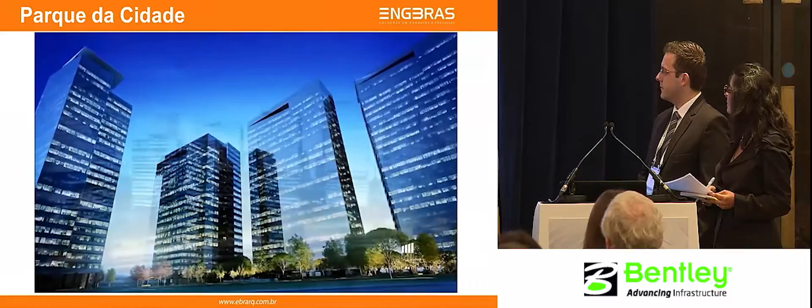It's a very large development with multi-use buildings. It's been created with the concept of compact cities, where everything that the user needs is there.

This project is located in the city of São Paulo in Brazil. The project has 10 buildings with different uses: some for residential purposes, commercial purposes, and a shopping mall.

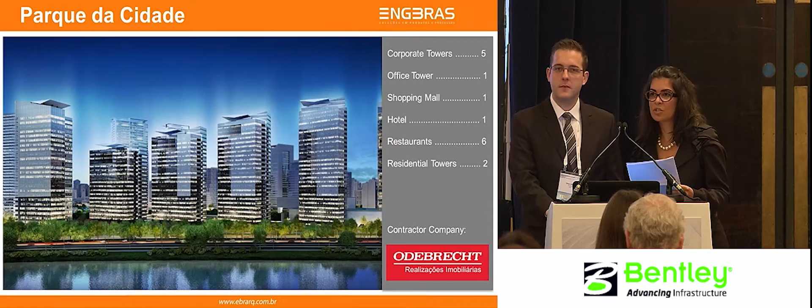It's not only the number of buildings that are impressive in this project. The concern about well-being and also having green spaces for users has been taken into consideration.

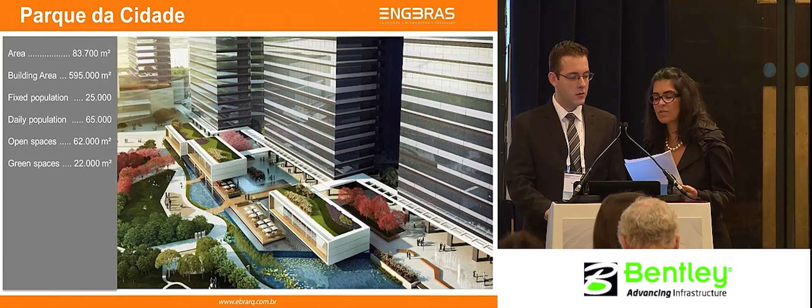We are expecting a number of daily users of 65,000 people circulating in the area every day.

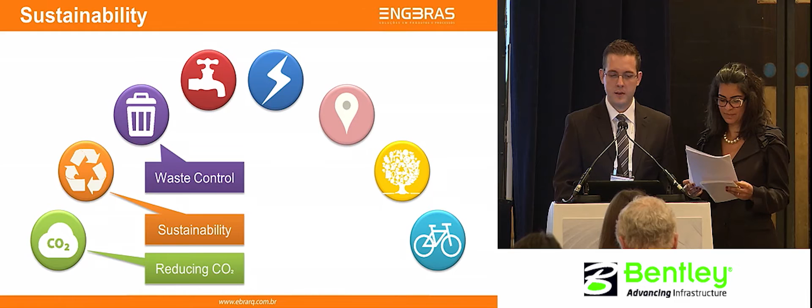Not only the project, but the entire construction structure and development has taken good care in considering sustainable measures. We have achieved reduction of CO2 emissions, waste control, we are reusing rainwater and also doing energy management.

It's important to highlight that we also included cycle lanes and we're trying to encourage people to use their bicycles instead of cars. We have green rooftops in order to reduce heat islands in the buildings, and also the concept of having a compact city.

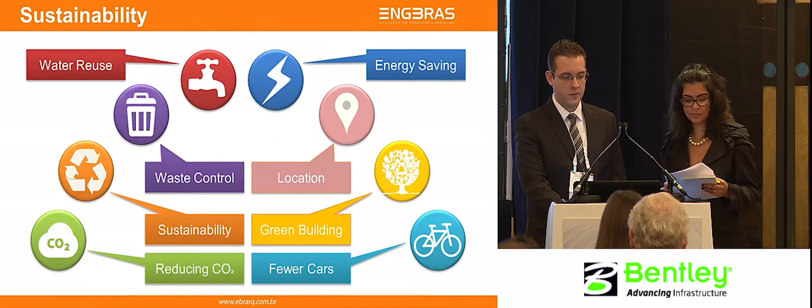Now I'm going to show you a very short video showing the urban infrastructure that is being built around this development.

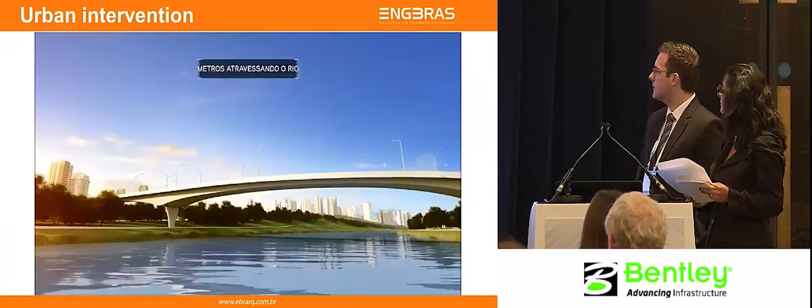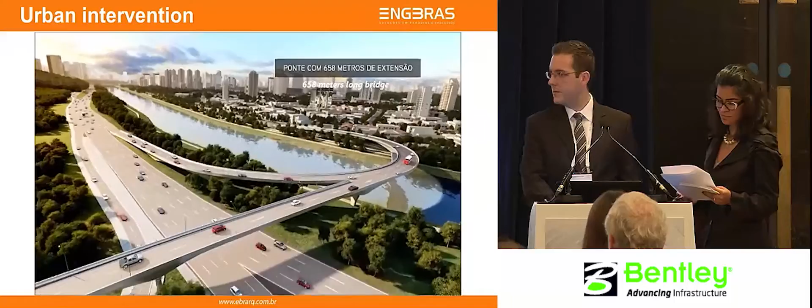Our concern with sustainability, not only in the construction side but in all the surrounding areas, meant that the project was awarded 2 certificates: the Aqua certificate and the LEED-ND certificate, awarded by the US Green Building Council.

In addition to these 2, Parque da Cidade is part of 18 worldwide projects that are helping to improve our planet, being part of the select group of the Climate Positive Development Program.

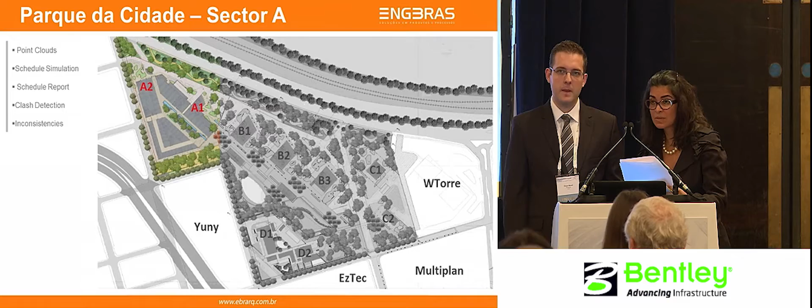In this implantation image, you can see the area where Engbras has worked. Amongst others, we did cloud points, simulation of construction, quantification of materials, interference analysis, and inconsistencies analysis.

Now I'm going to show you each one of these areas in detail, starting with the cloud of points.

Given that we were excavating 6 underground floors, it was necessary to study the soil displacement in order to carry out a very good idea of what was going to happen. We did that through point clouds. With the concrete structure and the point cloud study, we realized that there was a 30 centimeter displacement in one of the lateral walls, and that would have an impact on the number of parking spaces available.

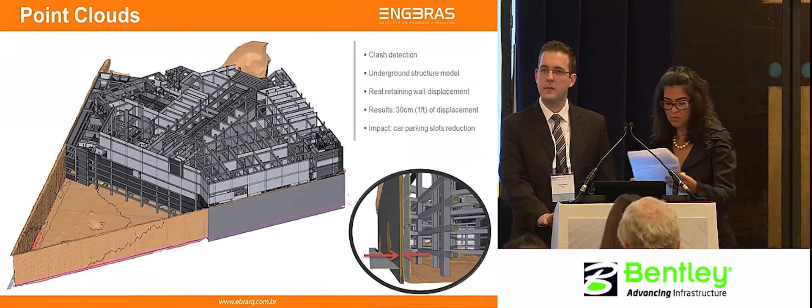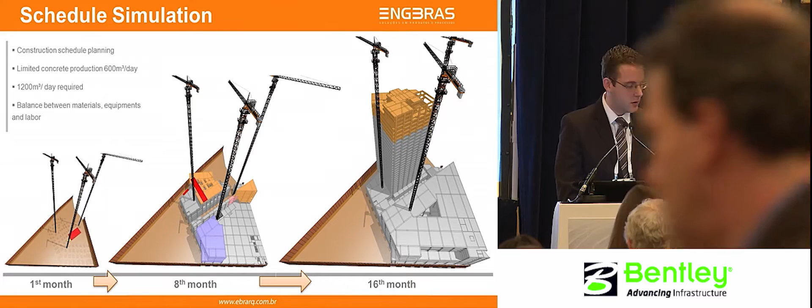The next area that we worked on was using the computer-aided project.

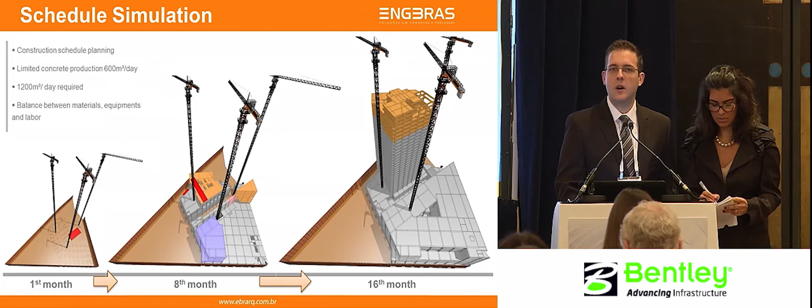In this study, we simulated the capacity of the site to produce the cubic meters of concrete for the construction. The site was able to produce 600 cubic meters of concrete daily, but during peak times in the construction schedule, twice as much was necessary. The simulation helped us find the ideal balance between production time and the need to purchase concrete externally to supply our needs in cubic meters.

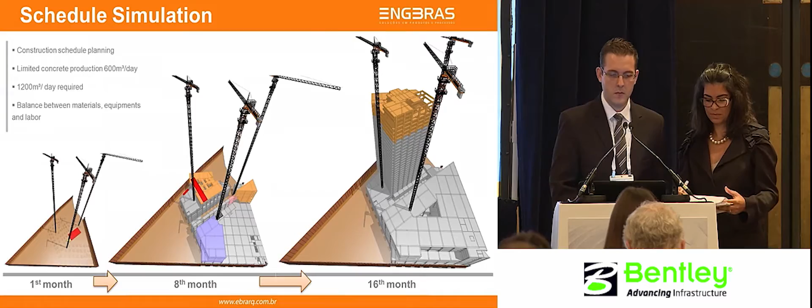Apart from concrete, Engbras also helped to quantify all the materials necessary for the site before construction began.

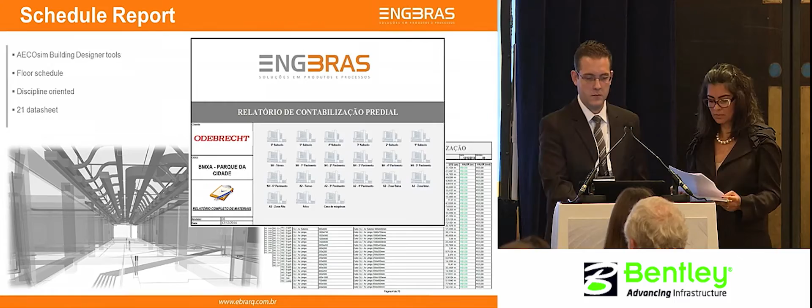Lastly, but not less important, interference analysis. The interference analysis was carried out between the structure, the design, and the installations during the construction of the entire development.

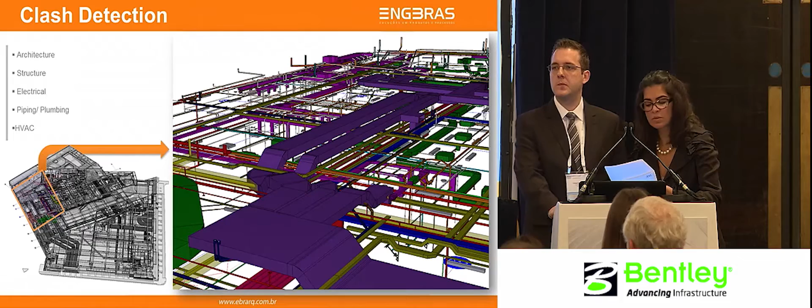The structure came from TQS, the architecture used Revit, and the installations used AECOSim. The integration of all the models was carried out on the Bentley platform.

Not only were interference analyses studied during the project, but also analysis of inconsistencies such as the ceiling height.

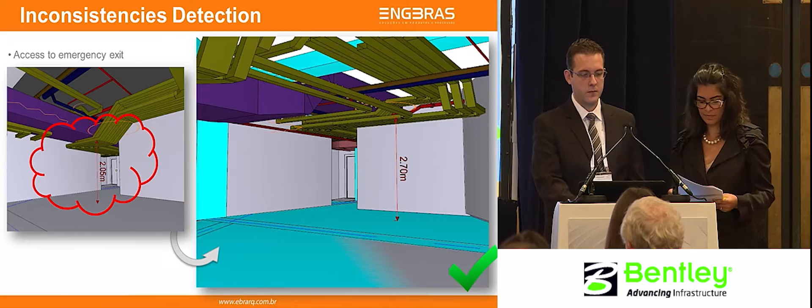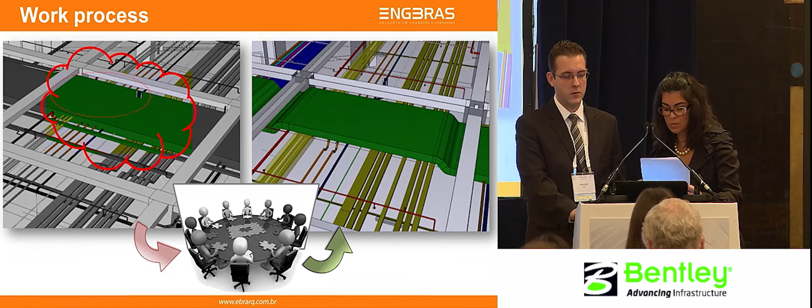All the interference analyses were studied in meetings involving all the designers carrying out the work. At the same time, Engbras simulated all the alterations, harmonizing all the designs, validating the work carried out, and reducing the number of project revisions and exchange of emails necessary.

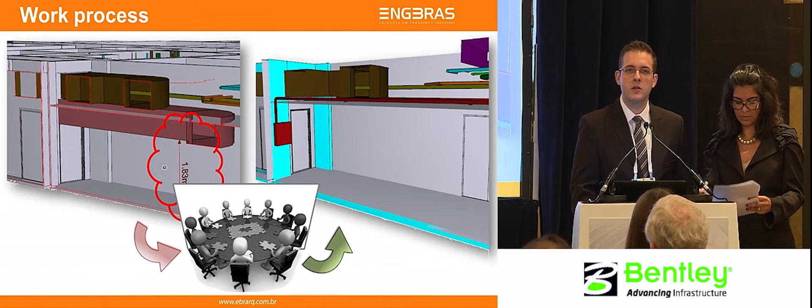Here I show you another interference analysis.

All the models used to make the project viable are now also being used for the construction itself. These models are all available on tablets.

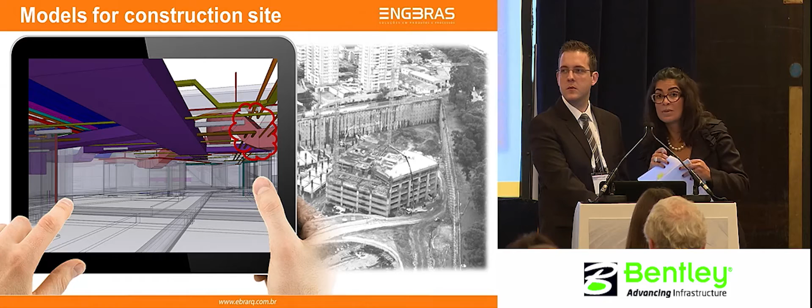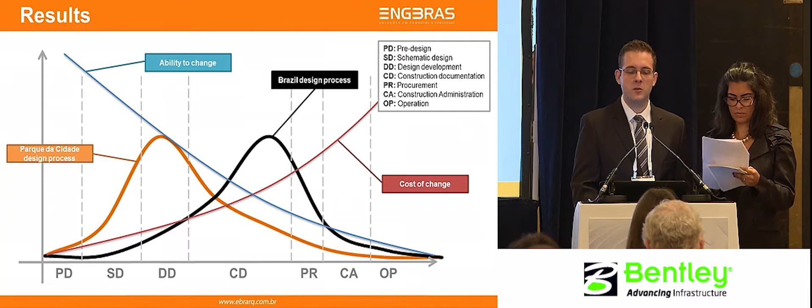As you can see, the use of BIM models and the partnership between Engbras and Bentley has improved the entire management of the Parque da Cidade project, bringing efficiencies much different from what we commonly observe in Brazil.

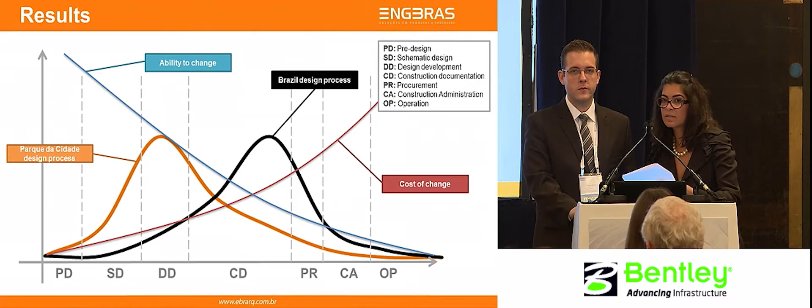As the site is still under construction, I don't have the final monetary figures to show you, but I can show you here today some considerable numbers.

Such as 770 interference analyses across the entire project, and 547 DGN archives in only 2.64 gigabytes.

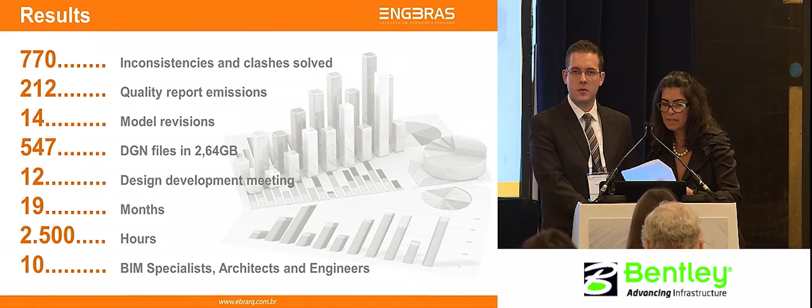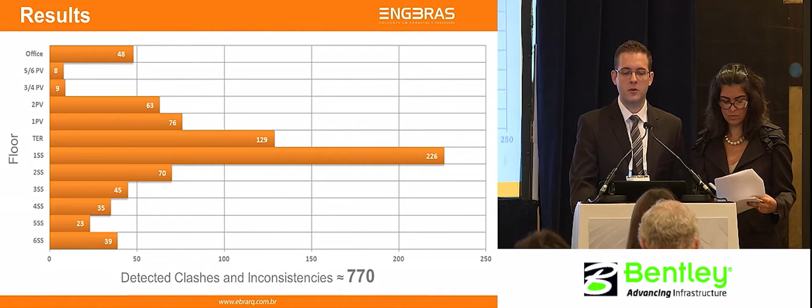The 770 interference analyses can also be seen per floor plan. As you can see, in the first underground floor, where all the installations meet, is where we have the largest amount of analysis carried out for the project.

Finally, through the development by Engbras together with Odebrecht, it was possible to effectively review the projects in order to reduce rework through compatibility meetings and model updates using Bentley software. To conclude, the partnership between Engbras and Odebrecht, with the revision of all the projects and avoiding rework, allowed us to bring efficiencies using the Bentley software for this project.